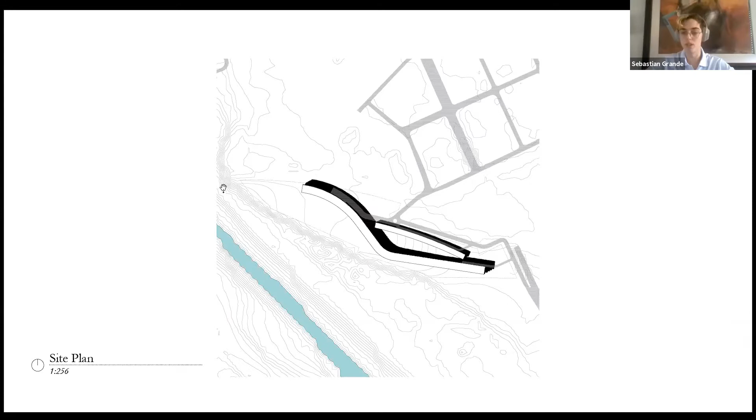At the largest scale, the building is made up of 2 masses which move along the length of the site. On the south side, a larger building made up of collective housing and public amenities, and on the north side, a smaller building made up of more private units.

These forms are oriented so that they can begin to configure the spaces around them into different regions. These aren't hard distinctions, but are instead implied through the use of hardscape, softscape, and shadows. The focal point is a central courtyard, which gently slopes upwards. The effect is a natural amphitheater, partially shaded and bordered by the covered walkways of either building.

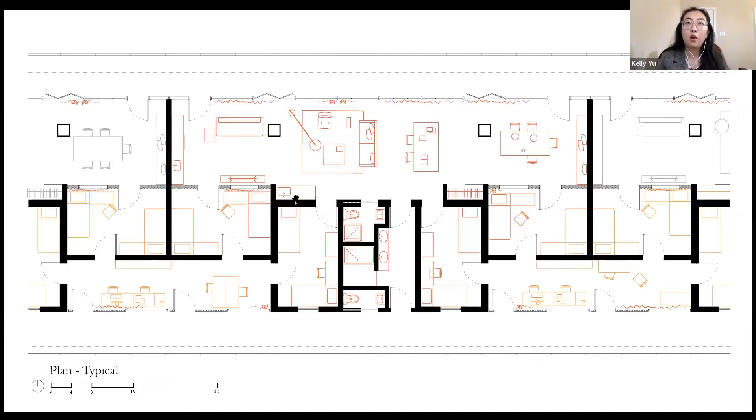At the smallest scale, our plan forms a kind of zipper of bedrooms and common spaces. Each bedroom is served by two different shared spaces: a larger, more public space along the north side, and a smaller, more private space along the south. These shared spaces are served by covered open walkways which run the length of the building. The bedrooms and bathrooms connect the north and south sides, and the shared spaces create loose social clusters running along the length of the building.

Under typical conditions, these spaces are very generous, but this anticipates closures of other public spaces beyond the scope of the project, for example libraries or coffee shops that students would otherwise work in.

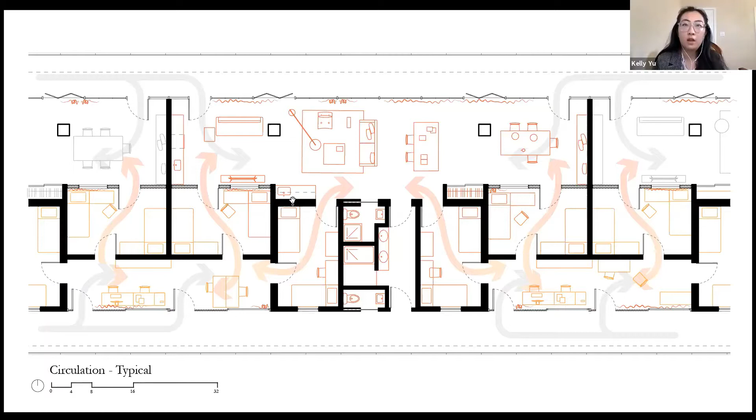Under pandemic conditions, each double can become a single, and by locking one door in each bedroom and bathroom, the plan is no longer permeable. The building becomes two discrete strips of program running from east to west, each common space now only shared by two individuals. The operable glass partitions, which separate these spaces from the covered walkways, serve two functions: they ventilate social spaces to reduce the risk of airborne infection, and they also make these spaces more public.

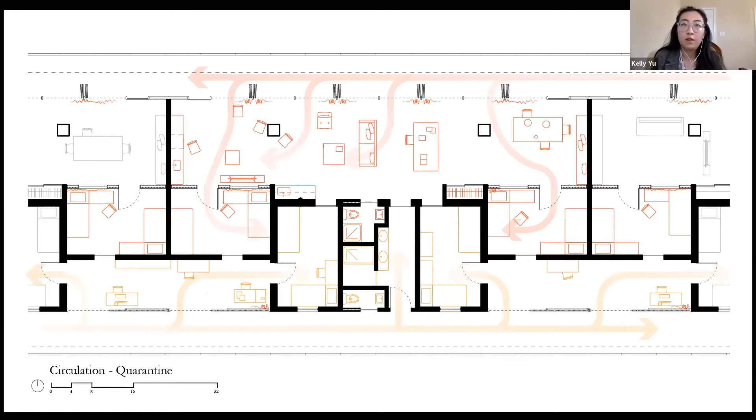The ground level of the building is populated by basic amenities like wheelchair accessible units, seminar spaces, a mailroom, bike storage, and parking. Here are some quick views of the upper levels.

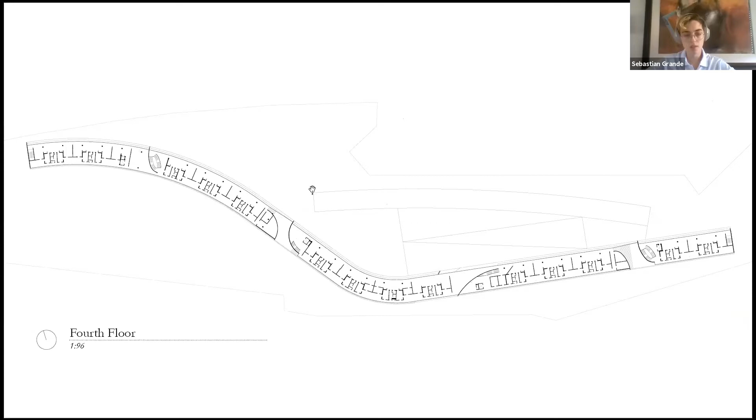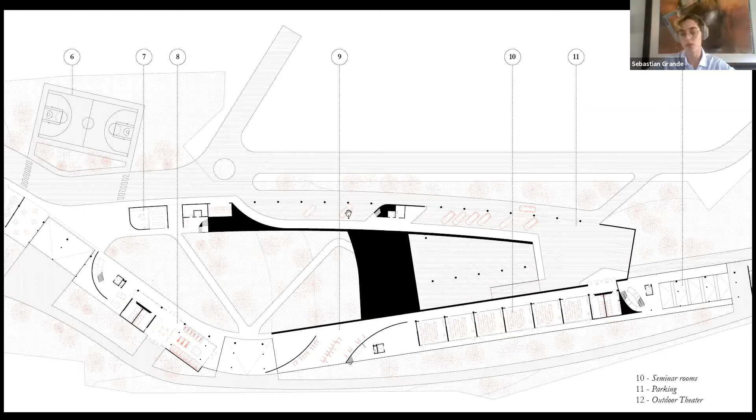So again, moving through the site on the ground floor, moving through the site on the second floor. And this is where the ramp leads up to a terrace on the second level.

While the residential modules are organized linearly in plan, the horizontal datum of the floor plates shifts freely in section. The covered walkways step up and down between levels to create a continuous path moving horizontally through the building that functionally separates the single mass into discrete parts.

The moments in which the floor plates step are shaded terraces that punch through the depth of the building, providing public outdoor spaces throughout the 4 floors of the building.

The curving concrete walls, which punch through the height of the building, articulate the vertical circulation of stairs and elevators that are grouped around each terrace, combining a meandering horizontal circulation path with a more direct vertical circulation.

As a result, the initially monolithic structure of this long dormitory building can be broken up into 7 distinct segments and further subdivided into a multiplicity of clusters for atypical and typical uses.

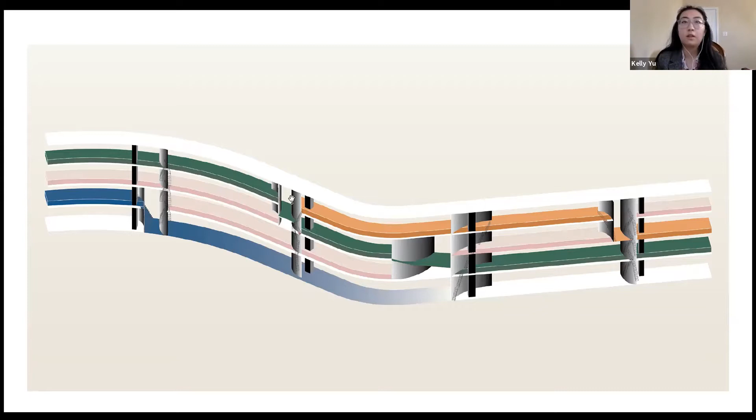Here's a final image of the main structure of the building, demonstrating the porosity that it achieves. Thanks.

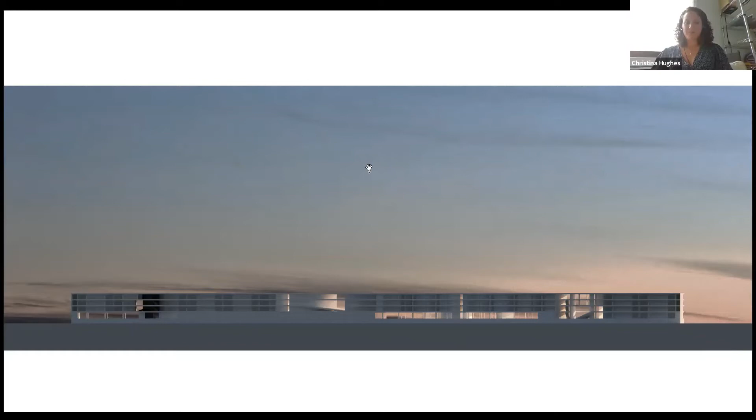Yeah, sure. I appreciate the presentation and the design. I guess I have one kind of general question for you all. Our understanding of the virus and its implications for the built environment has kind of been evolving, as y'all probably know. Advice in the building industry has changed from March all the way till now. And I'm just kind of curious, in your research for this project, what was the most surprising thing that you learned?

I think probably one of the most surprising and perhaps also the most troubling is the sort of changing nature of the virus, the mere fact that research is still in development, and we have to design a building for this condition while we still don't really know what the specifics of social distancing needs to be, what interior ventilation really needs to be.

Yeah, I think what we learned was that the hardest thing to take into account is human behavior in battling this virus. And I think that's sort of what we wanted to focus on in creating a building that lets you safely live there, but also without feeling like you're always under quarantine or always restricted, because understanding that college students probably don't want to live in quarantine all the time, and by creating the best possible environment for them, the more likely it is for them to safely follow these precautions.

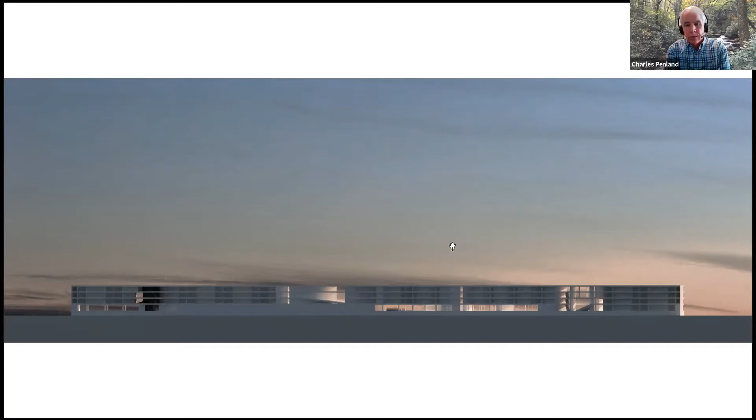Moving quickly to the ground floor, one of the biggest things we had to understand was that this site is semi-removed, and the length of it gives a sort of directionality to vehicular and pedestrian traffic. With that in mind, we wanted to create as much ease as possible moving between these two sites while still keeping vehicular and pedestrian traffic separate. I think that manifests itself in the linear movement horizontally as you enter from the east side to the west, or leave from west to east.

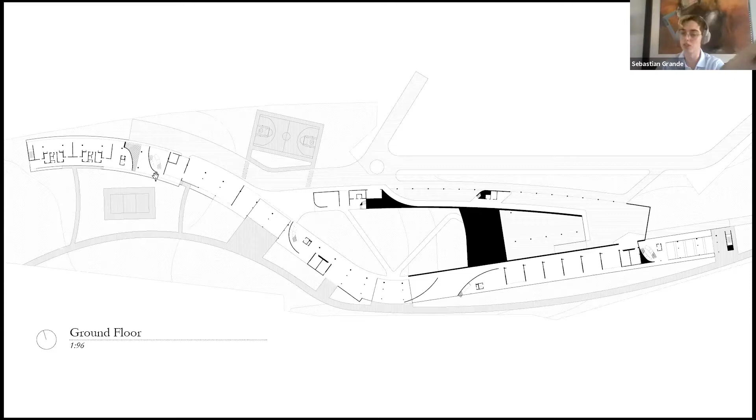Okay, thanks, that's my question.

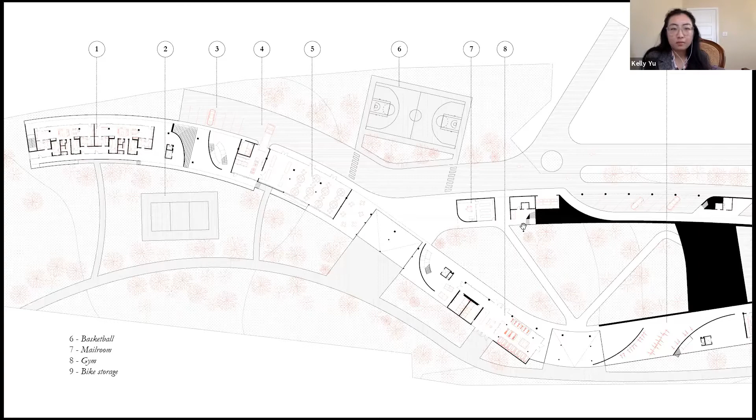For example, all the shaded terraces open up onto the north side. As well, they're not only located on the ground floor, with the aim that if you live on the 4th floor or the 3rd floor, there's not that much physical or mental distance to access these spaces regularly.

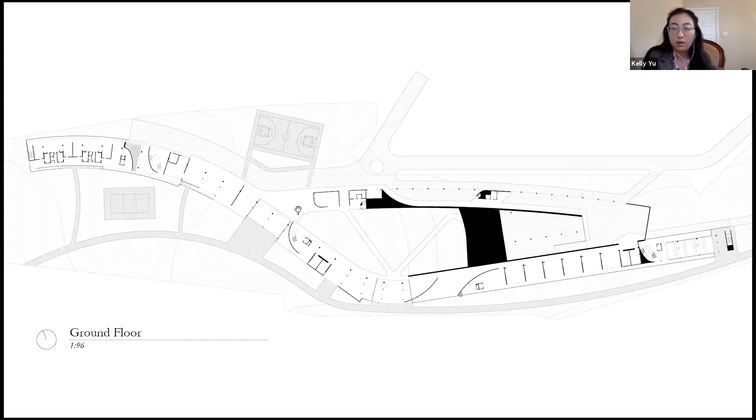We also tried to connect it to the bayou, where there's a running path people might use for physical wellness. In terms of mental wellness, I think that's hard for architecture to prescribe, but with the social clusters we're trying to create, we try to address the need for both privacy and socialization within the student experience, so you always have a private space when you need to be alone or work in quiet, but also a more public space that everyone has equal access to when partying or watching TV together.

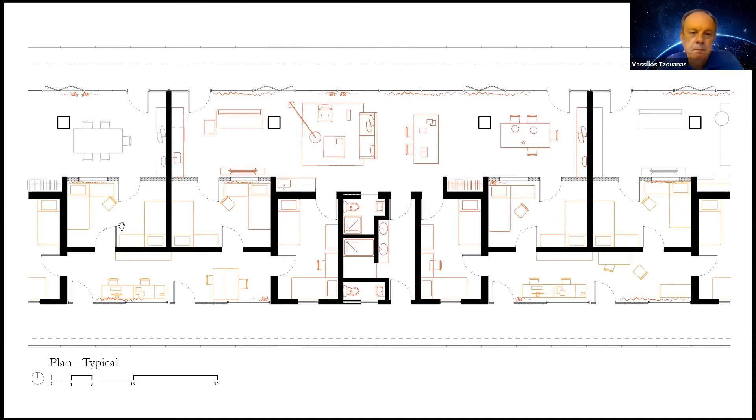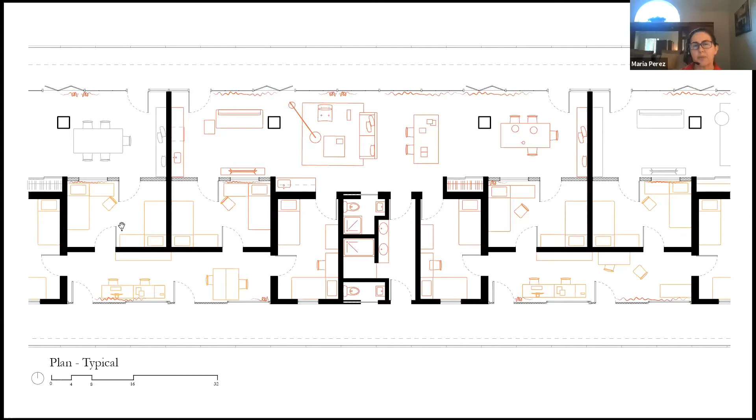I think I have two questions. The first is one of the requirements in the competition: you guys have to think about technology and how it's going to help shape this building. Can you give a little more explanation on how you're going to be using technology? And the second question has to do with modular construction. Thinking about cost efficiency, have you considered modular construction for these dorms, and do you have any suggestions for that?

Speaking to the modular construction, the building itself is a series of modules simply arrayed along the curvature of the site, which made both the design and the hypothetical construction much simpler. Structurally, I think this could be compartmentalized very easily. There isn't a lot of overwrought specific form other than the places where we interrupt the module.

Speaking on technology, we chose not to focus the design on incorporation of technology because the healthcare technology is rapidly evolving right now, and we didn't want to prescribe the way it should be because it'll probably change very soon. Also, a lot of the technology currently used in education is widely available and more personal, like laptops and phones. Other technologies like PPE we think would be up to building management to fit in. We don't think that shaping the design specifically around those things would impede the implementation of those things, but we also didn't want to specify the building to match only those things.

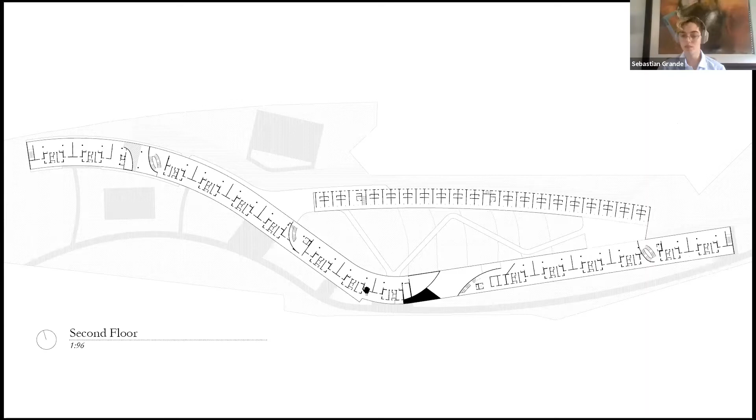Yeah, so, like, for example, sneeze guards or plexi walls.

The reason I was asking about technology is because you're going to have a lot of natural ventilation here. Houston is very humid, so you will need some sort of sensors in the units to track how much humidity is in the air and to understand when to turn the mechanical systems on. I'm assuming you're going to have a hybrid system with natural ventilation but also mechanical systems for when it's very hot in the summer. Houston is humid and hot, so having that technology to know when to turn the air conditioning on and off would be a good component.

So that's one of the reasons I asked about sensors and being able to understand thermostat, humidity, et cetera. Sorry, I think I misunderstood your question.

In terms of mechanical systems, with the sliding doors or movable partitions that we have, we imagine there would be sensors so that when those are open for longer than a period of time, the air conditioning in that section would stop. But we imagine those would typically be closed unless it's a specific circumstance the university is aware of, or for special events.

One of the biggest challenges in Houston is air quality. Our air quality isn't so good, so having sensors to know when the air quality is good, so you can open the windows, would be ideal.

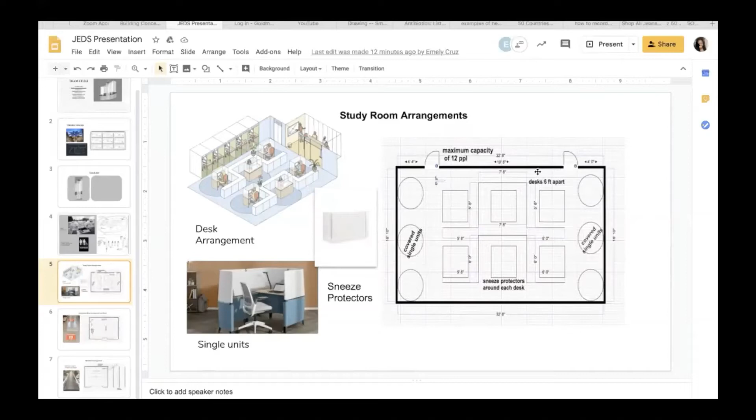The study rooms in the dorms will contain a maximum of 12 students for the smaller rooms and 36 students for the larger study rooms. All desks will be 6 feet apart, and each individual desk would have a sneeze protector to further protect students, as disease is airborne. The single unit studies at the side will also be covered, protected, and labeled. There will be informative posters on the walls in the study room to inform students on how to protect themselves during an outbreak such as COVID.

There will also be need for a convenience store in the dorms, both during the pandemic and during regular school, and we decided to call our store Stay Style. The convenience store will have automatic doors and will contain a maximum of 36 people at a time during an outbreak such as COVID. There will be 6 feet markers on the ground to enable students to keep the appropriate distance from themselves. There will also be multiple checkouts containing one worker at every given time, so student workers are also able to protect themselves. There will also be the option of self-checkout to further reduce contact.

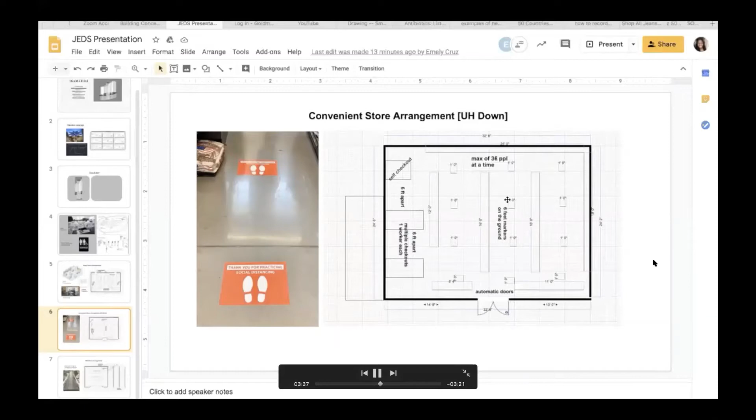The convenience store will include a pharmacy where students can buy over-the-counter medication in case they fall sick or begin to exhibit symptoms. There will also be need for a mail room so students can continue to receive their packages during quarantine, since online shopping is very prominent during quarantine. Students can either pick up their packages from the mail room or pick up their mail from the mailbox.

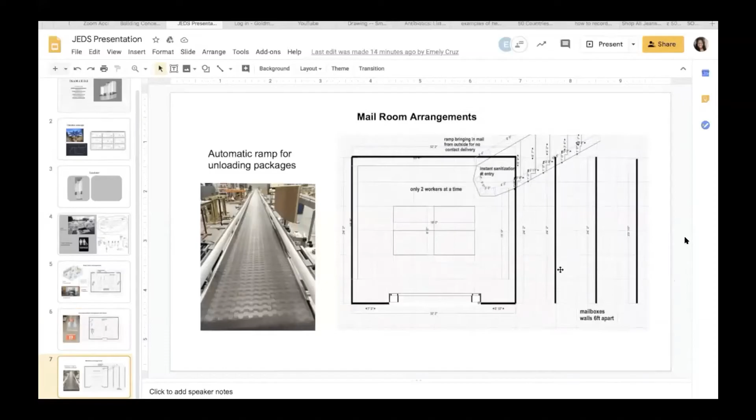Both of these parts of the gym are going to be reservable, so that you can reserve what type of equipment you want to use online. That way we are limiting the amount of people inside the gym and making sure that everybody is evenly spread out, safe, and comfortable when they are working on training the body.

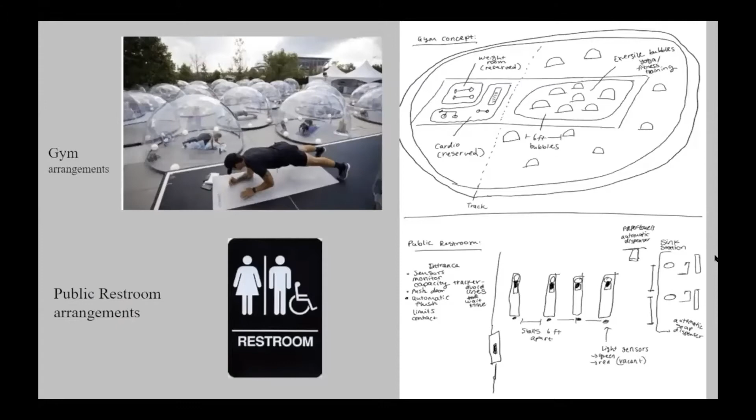Dorm rooms are created in a way where each student is separated by a wall, but still in the same dormitory so they can communicate and have someone to talk to. Another thing we want to add is a doorway that you can close up and open whenever you please. There will also be separate sinks, which creates a more sanitary, safe environment for the students.

Students will be allowed to go down to the restaurants and get in line, but of course, 6 feet apart.

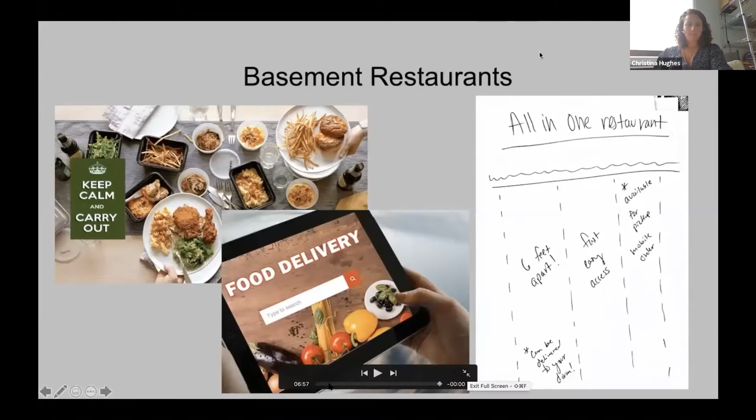Sorry, I was on mute. How many rooms are in this building? There's going to be a total of 150 rooms. And then just the other question, can you talk a little bit about this elevator?

You say the elevator is at the center of the building. How is this elevator going to function during a pandemic like now? How are people going to go up and down without 6 feet of distance? Can you explain a little more how that's going to work?

Yes, so we were planning on having separations, like being able to mark each step so that people can know how far apart they need to stand from each other. Oh, so they will use the stairs all the way up, is that what you were saying? Yes, instead of the elevator? Yes. Okay, thank you.

Okay, Dr. Joannis. Again, thank you for your presentation. Maybe I missed it - do you have a picture of the building, or is that one that you have there? And how does it blend with the rest of the buildings at the university? Does it carry the same theme, or is it totally different?

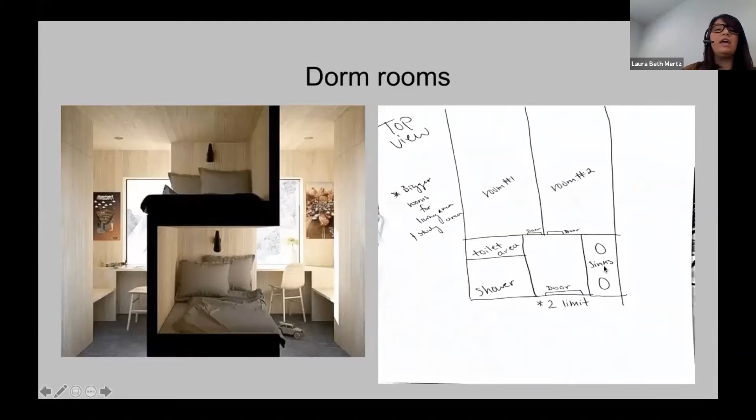I did like that you addressed, when talking about the garden aspect, having public art. I think that's really important, creating that sense of community, and I think celebrating public art really contributes to mental wellness.

So it was kind of hard to see - I agree with the last comment - how the building is situated on the site, to understand the connection someone would have if they were in their dorm room to the outside, and how the building relates to the site.

So our plan was to make the garden on the rooftops. On the left side of the building, it would be on the roof of the second floor, and on the right side it will be on the roof of the third floor. So depending on what side your dorm is, that's the side you can use the garden for. We were hoping it could be a place where students could go and take a rest, since they will most likely be in the building the majority of the time during a pandemic.

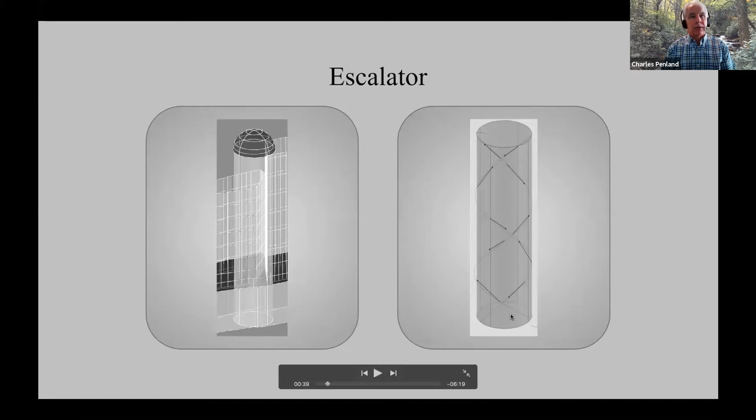I guess the other question on your garden, I assume that's down on ground level, and I'm curious about, you've got floodplain issues, a train track running by you on the north, Metro Rail on the east. How does that get protected and become usable?

So the plan was to make the garden on the actual building, like on top, on the roof levels. Okay, I didn't understand that. Okay, thank you, that's all my questions.

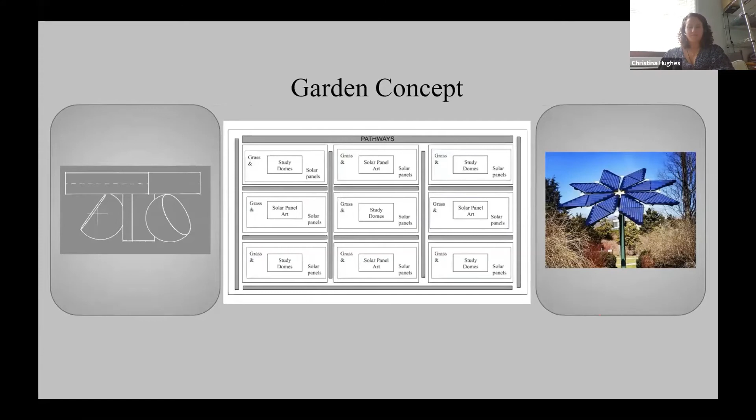Okay, great. And Holly? Yeah, I appreciate the presentation.

I appreciate y'all really diving into the weeds on trying to solve some difficult challenges related to moving people vertically in a building and how to organize workspaces and workout spaces. But I feel like we're reading a book and we just skipped immediately to like page 215 or something. I kind of want to give you all the chance to articulate an overall concept within which some of your problem solving is taking place.

Similar to some of the other judges, I guess I would just have the question of how did this building arrive at the form that it's at? How is it responding to the site and the climate? What makes this building belong on UHD's campus right next to White Oak Bayou instead of at, you know, the University of Arizona or Yale or University of Toronto or something? How does it belong here?

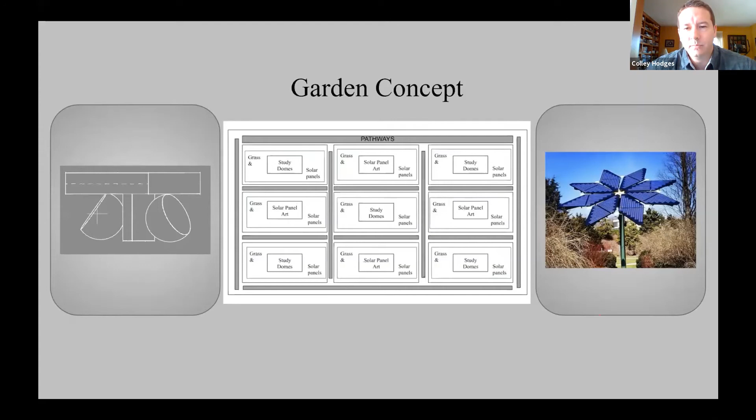So all the slides that we showed you, the main buildings, the gym, the mail room, the convenience store, the study rooms, and the restaurants, how people get food — we're just trying to highlight the major things that would have to change in an outbreak. But it's still like a regular dorm. Everything else is still going to be the same, basically.

Okay, and I would like to add that yes, there is a lot of information that is kind of missing and would need to be more thought out, but the main topics we illustrated today were more so what the student would be asking — like this is where they will be living, their rooms, the gym, what they're going to be eating, how they're going to be efficient and still be successful college students. These ideas are just really general on what the students would be asking us, so yes, there's a lot more information we would have to explain for our project.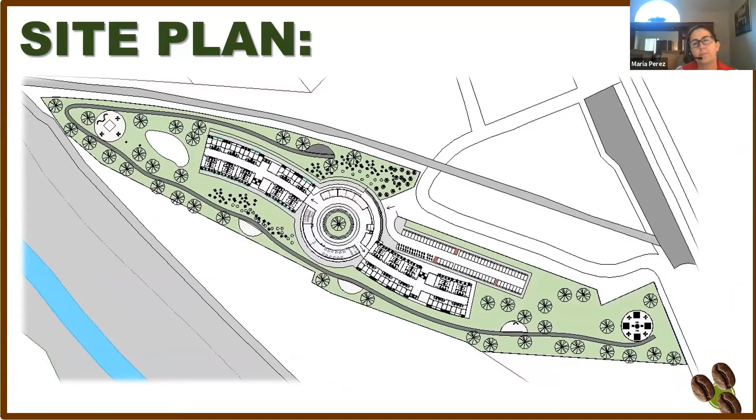Located at downtown Houston, we have a 7.4-acre site that we needed to develop into a dormitory building for University of Houston Downtown. This design was inspired by the coffee bean. Why the coffee bean? Because coffee represents reunion, represents community. That's why in the middle of the design I have called the Coffee Bean Facility Center. This center is connected to the resident halls, and we will also have this outdoor area for the students. We will have a walking trail.

Hey Laura, it's really difficult to hear your audio. Okay, sorry. I put more volume. I hope this will work better. I'm sorry.

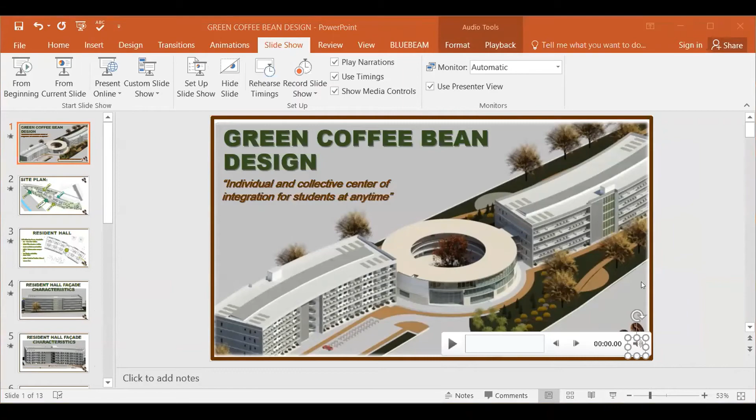Good morning, my name is Laura Rojas, and I'm here to present what I have called the Green Coffee Bean design. Before I start, I just want to tell you that the main goal of this design is to have an individual and collective center integration for the students at any time.

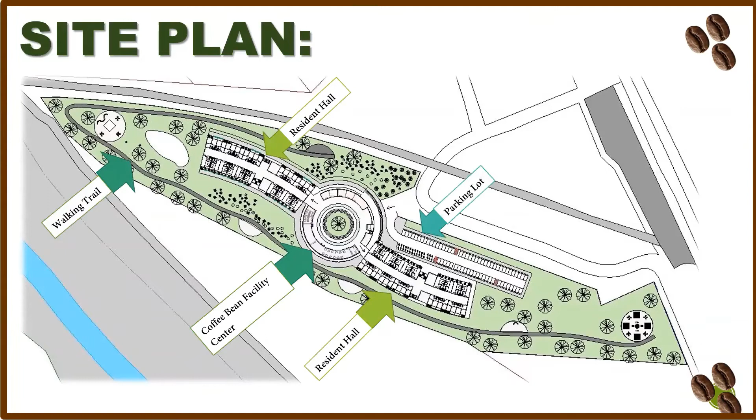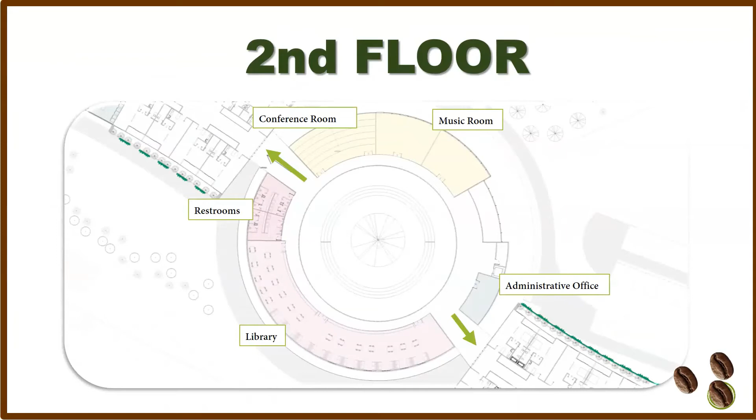Mainly here we have the library, and this is the administrative space dedicated for the library. And we have restrooms as well, along with space dedicated to staff information.

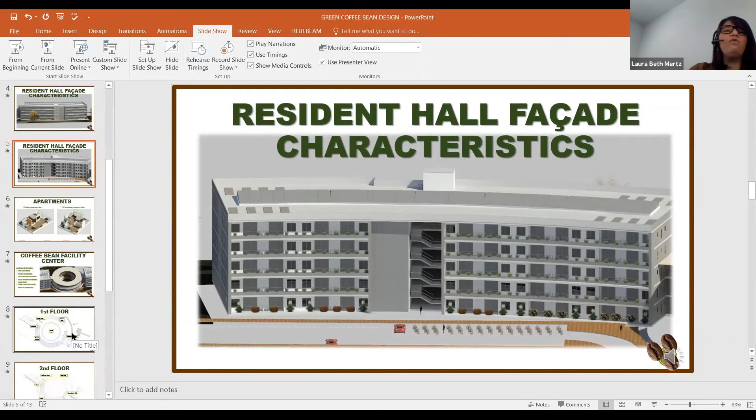Yes, well, actually, if we are in a COVID situation right now, we will have to coordinate the circulation for people, trying to not let them meet each other. But it's also the reason why I picked it to be a circle, because that allows the student to have one path where they can see everything that is going on. They can see who's coming, so to avoid that, we don't have a crowd of people in the same place.

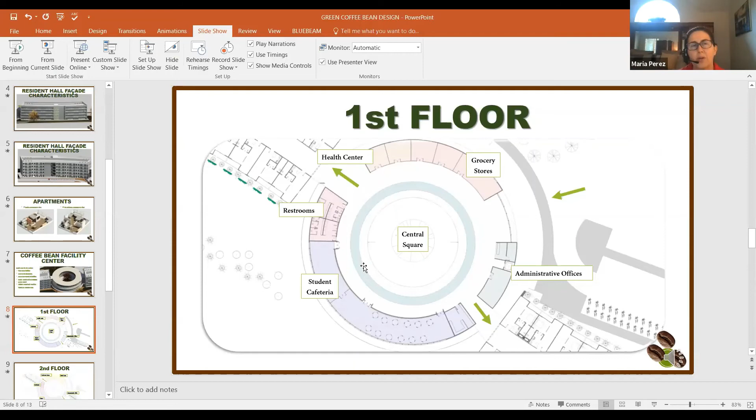Okay, thank you. Okay, let's go to Maria next. Great work, I think you thought about a lot of things in this, we couldn't hear, but the first question is how this building interacts with the university, the community connection. Can you talk a little bit about that? And also about the roof, I couldn't hear, is that solar panels on the roof that you're considering, or can you expand a little more about what you're thinking on that and how that connection with the community is going to work?

Yes, so for the first question, when I was looking at the site, I know the school is, if I'm not wrong, crossing this river. So I think one way we can connect this space to the school is, we have this social center, this coffee bean facility. We can have a library, we can have even a conference room where the school can be involved, part of the school. The library can be something the school is involved in. The conference room, one day if we need a classroom, a class that needs to be face-to-face, the school can participate and be there with the students in these areas.

For the roof question, yes. My main purpose here is to have solar panels. Of course, I left a lot of space, I'm not counting mechanical equipment, and that's something that is going to take some space here. This in the middle is like a glass roof that will allow sunlight in. My main goal was to take advantage and maximize the daylight to avoid the use of electrical energy.

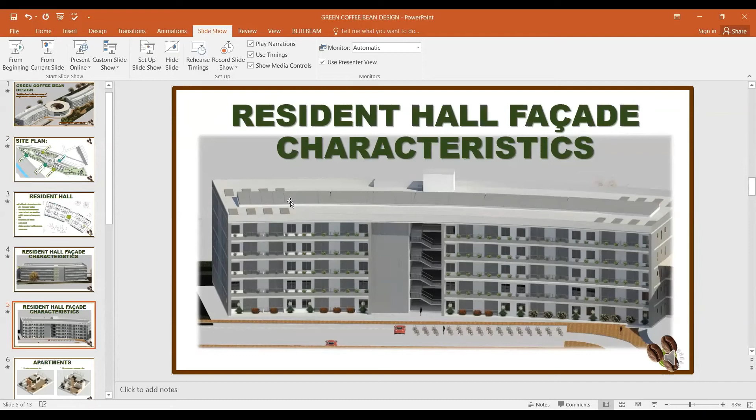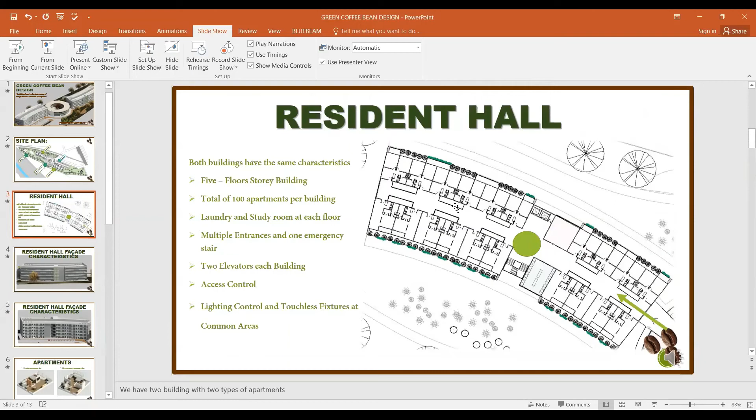So here, open roof, and one aspect you can see in the floor plan is these voids. These are void areas that, because we have the open roof, allow light in. Without these voids, the light would just go to the 5th floor. Having these voids allows me to have light all the way through to the 1st floor, at least somehow.

Okay, very good, thank you, appreciate it. Okay, Charlie? It took all my questions. That's not fair. Very nice visual presentation on it, I think you covered a lot very nicely.

I guess the big thing on this is how the rooms themselves function differently from a COVID situation versus a typical situation. Could you get into that a little bit?

Yes, so if I look at the apartments, if I tell you the truth, the rooms do not have anything special, I mean, of course, as I told you, we have the touchless fixtures and lighting control.

But I was thinking more, when I was living in college, normally the resident apartments are next to each other, very tiny rooms. Right now, if I'm a student deciding to live on campus or go back home with my family, what will make me stay? That's why I wanted to give more of an apartment look for these dormitories, to make the student feel that difference. In this case, compared to a normal room, they will have their own kitchen, their own bathroom, and their own space.

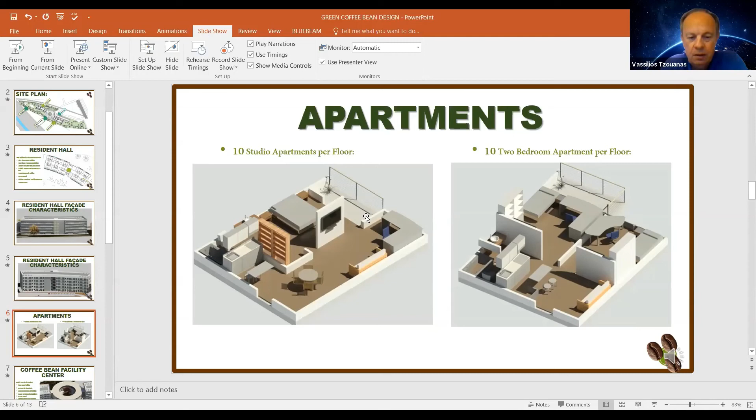This building will be in a zone that is prone to flooding. The parking lot is going to be on the ground, and it seems the first floor also will be at ground level. How do you account for these issues that are inherently present on that site? And what could be the cost for such a building?

Okay, so 10 million, 50 million, $200 million, what?

Cost-wise, I'm thinking this is a glass curtain wall structure, so that's going to add some cost, along with a regular concrete slab. I'll give it a shot and say around 50,000... million, I'm not sure. I know because of the materials I'm proposing to use in the facade, it's not going to be the cheapest way to do it, but for sure it's going to be sustainable and make a difference for the students.

If I understood the first question correctly, you're asking whether this area is going to be a flattened surface for the first floor and parking lot. There's a bayou there, and that area typically floods almost every other year. I'm a civil engineering student and I like stormwater management, so in this wide area I wanted to have a stormwater management facility, not really a lake. We can add one here to catch stormwater, and with the green area it gives a natural look. That's how I'd resolve the flooding issue—adding something like a lake to catch the water.

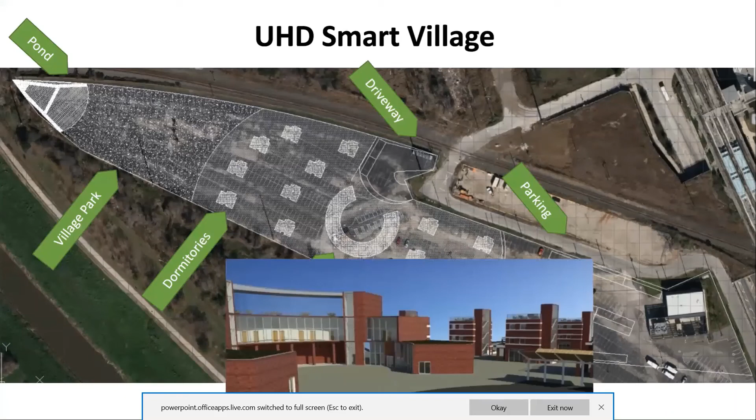Our design philosophy for Project 1 is to better connect students to a caring community within a sustainable and beautiful environment. The 14 dorm halls encircling the PAC Center provide each student with a personalized community immediately upon arrival to campus. The PAC Center, our main building, provides spaces for nourishment, meeting, well-being, and relaxation. Together with our beautifully designed park and parking lot, these buildings create a self-sustaining residential village ready to tackle any challenge.

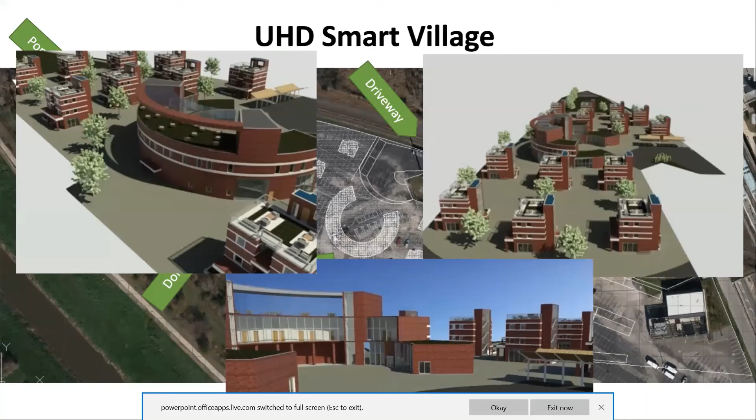The residential life we designed provides each student with multiple communities to be part of immediately upon arrival, so no student feels alone or overwhelmed during their time at UHD. Our dorms are 4 stories with a basement, housing 8 students in 4 two-person rooms on the 2nd and 3rd floors. The first floor contains a kitchen, living room, study room, and dining room, designed to promote shared living. The basement holds laundry equipment, and the top floor is a grass roof terrace with seating and space for rooftop activities, offering a full view of downtown Houston.

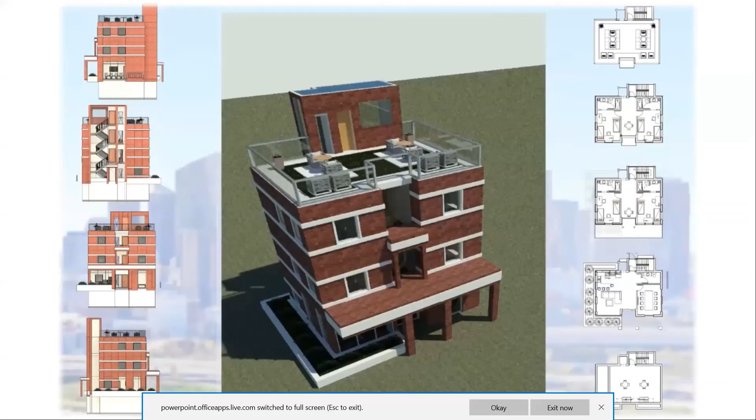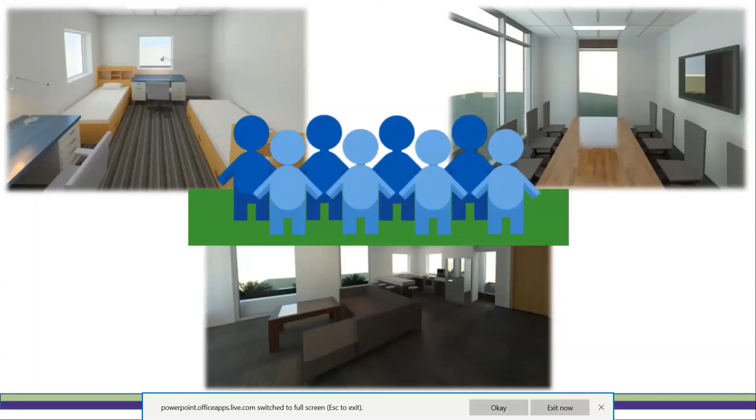And now, pandemic time. We built multiple buildings, also keeping in mind how to mitigate the spread of sickness. The population density is spread out and smaller this way. If one person from one dorm gets infected, isolation means the spread can only get to those 8 people instead of the overall 100. It also helps by making it easier to track down who's infected.

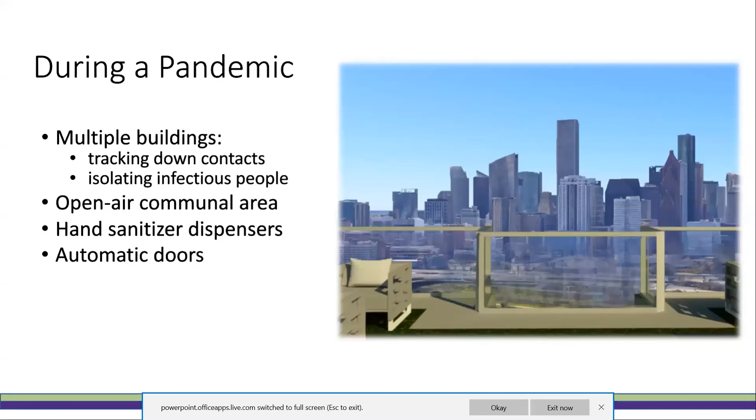The open air communal area on the roof allows people to hang out within the dorm without fear of infection. The open air also keeps it well ventilated, which helps keep people from getting sick. A hand sanitizer dispenser presented right at the entrance keeps people mindful about keeping clean, and the first floor door being able to automatically open keeps germs from spreading.

So that wraps up our dorms. This is the PAC Center. It's the main building that's central to the community. It contains student necessities and assistance, and is named after its resemblance to the lovable arcade character Pac-Man.

PAC Center's first floor has many different features, one of which is the front desk, located to the right. This organizes appointments to the administrative offices behind it, as well as handling student queries. On the left is a combination convenience store and cafe, great for on-the-go food or basic amenities.

The Student Health Center, on the far side of the building, puts student health front and center and is more easily accessible for those living nearby than the other student health center on campus. There's also a room for delivery and cleaning bots and their charging hubs, but we'll get into that later.

The first floor is flexible in its use for student organizations that want group events or any other type of organization. The cafe and courtyard are designed to be the social hubs of the PAC Center.

The second floor of the PAC Center has multi-purpose rooms that can be classrooms and study rooms, as well as club rooms if you would like to rearrange them. And the third floor is a rooftop terrace with seating, greenery, and a view of the Houston skyline.

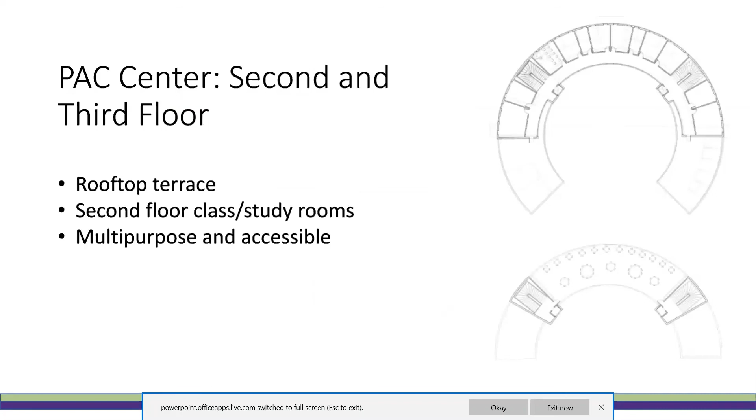So if the quarantine happens again, the center hub will still remain the center of action. The Student Health Center is isolated from all the other areas and is connected to the staircase, which will allow the second floor to become quarantine housing if necessary.

The convenience store and dining tables presented in the top picture will become a separated shopping experience that streamlines students down one aisle, where it's easier to maintain cleanliness, and place distance markers to make it a quick grab and go.

The building should always be cleaned, but it could be cleaned even more by sanitizing it every night with a clean mist. And UHC should also provide care packages with cleaning supplies and PPE so that students can take care of themselves and others.

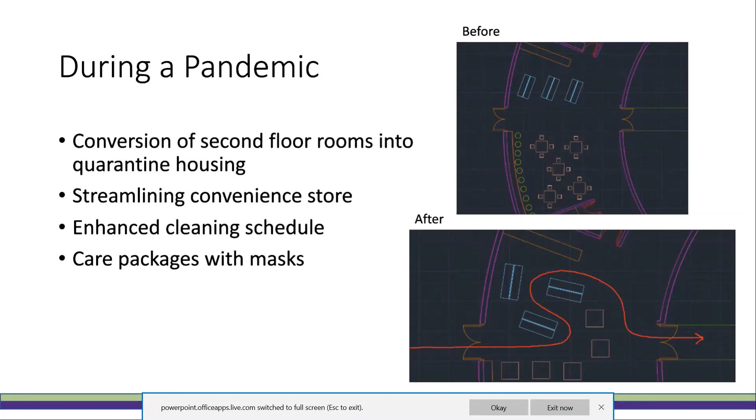We also hope to incorporate lots of technology to provide security, comfort, and wellness to all of our residents. For example, automatic doors and card-activated locks will minimize unnecessary touching. Hand sanitizer dispensers in central places will help fight the spread of germs.

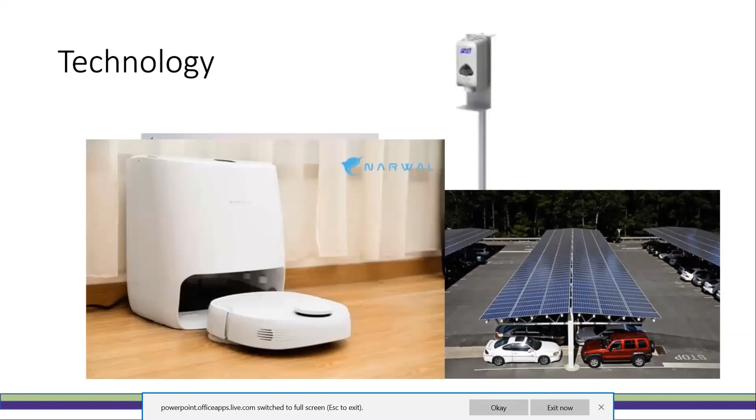Motion sensing lights and solar panels on rooftops and covered parking will increase energy efficiency. We'll also have robots in the PAC Center performing two main functions: cleaning and disinfecting the air in high traffic areas, and delivery robots that can bring food or supplies to dorms under quarantine.

Our facility features an abundance of green spaces to be used and enjoyed at all times, but these spaces will become even more important in times of isolation. Each dorm building has a rooftop garden with a wonderful view. The PAC Center's terraces can be enjoyed even while maintaining social distancing. Together with the expansive green field and swamp-like pond and boardwalk area, our facility can give residents a connection with nature under any circumstances.

To close, we believe that the Smart Village is the perfect residence hall for both the good times and the bad. Our 8-person units foster a sense of community and will help mitigate the stresses of isolation. Our buildings and grounds are adaptable and can change to meet the needs of many situations. Our green spaces preserve the spirit of natural beauty, and our designs, materials, layout, and management are sustainable and efficient.